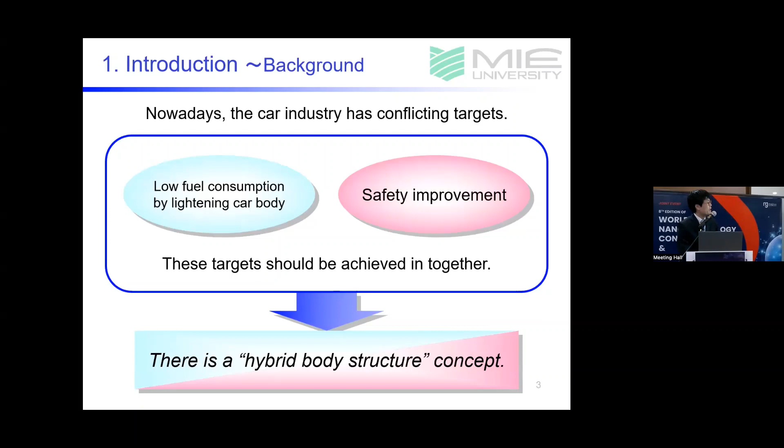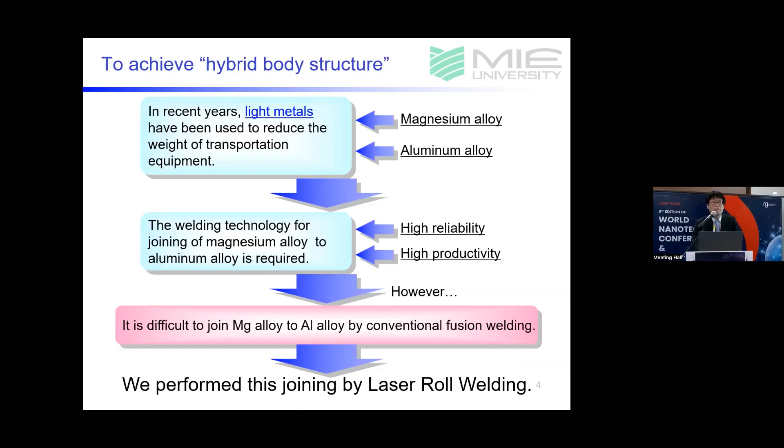So we perform this joining by laser roll welding. This figure shows a schematic drawing of the laser roll welding facility.

Laser roll welding was developed for joining dissimilar metals by Professor Kutsuna. A pressure roller was mounted on a laser facility. It was developed for making lap joints.

At first, material A is placed on top of material B, the upper plate on the lower plate. The laser heats only the upper plate. The roller conducts good contact between the two sheets and rapid heat transfer from the upper plate to the lower plate. The joint is made in this way.

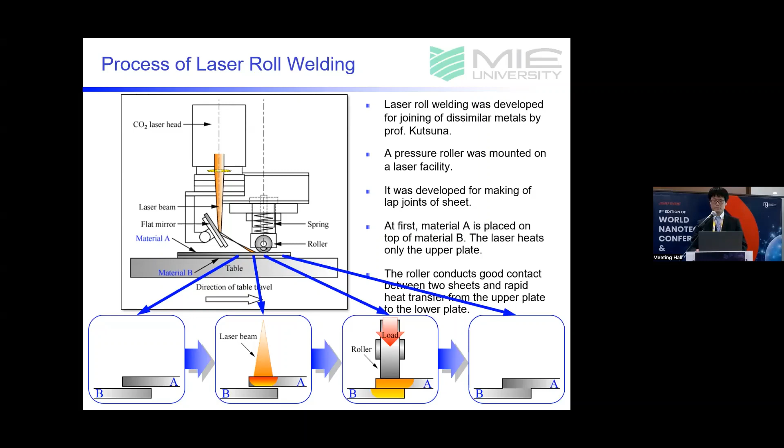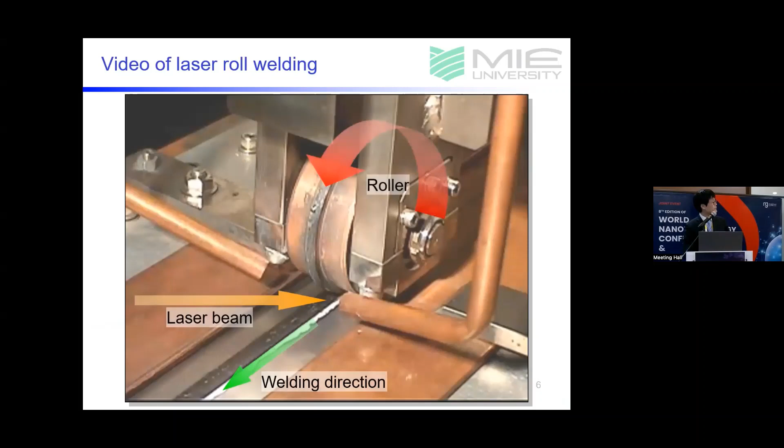Now let's show you the video of the laser welding. In this image, arrows show welding direction and laser irradiation, roller rotation, and shielding gas flow, respectively.

This welding is silent, no spatter, no arc, no porosity. Welding is over.

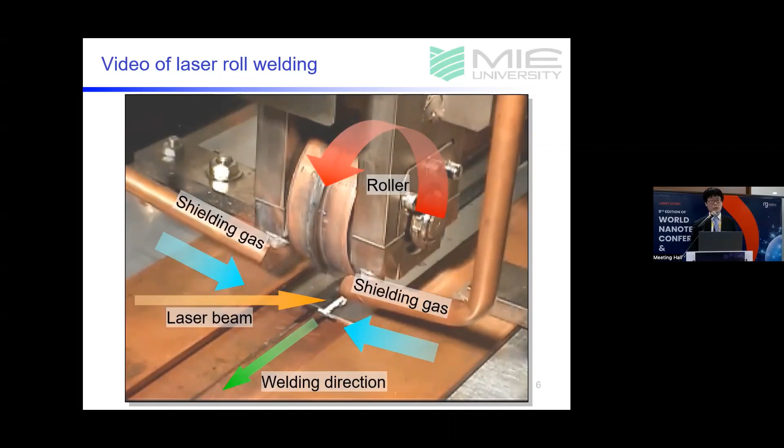In laser roll welding of materials with large melting point differences, the laser beam is irradiated onto the material with a higher melting point. But the melting points of magnesium alloys and aluminum alloys are almost the same. In this case, it is unclear which material should be irradiated with the laser.

Therefore, in the present work, laser roll welding was performed by changing the welding conditions, and the influence of the welding conditions on the joint strength and the microstructure formed at the joint interface was discussed.

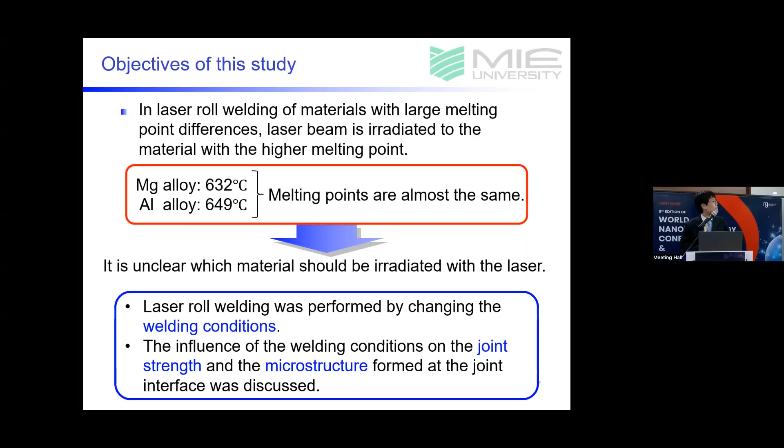For the materials, magnesium alloy sheet MP-AZ31B and aluminum alloy sheet A5052P were used. The thickness of both sheets was 1 millimeter. This table shows the chemical compositions of the materials used.

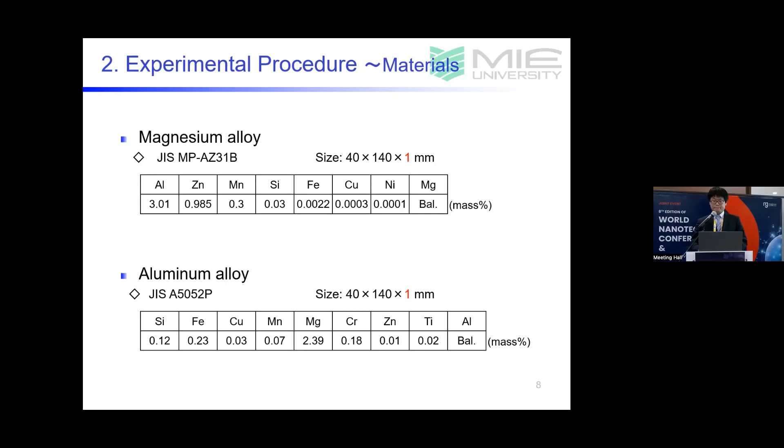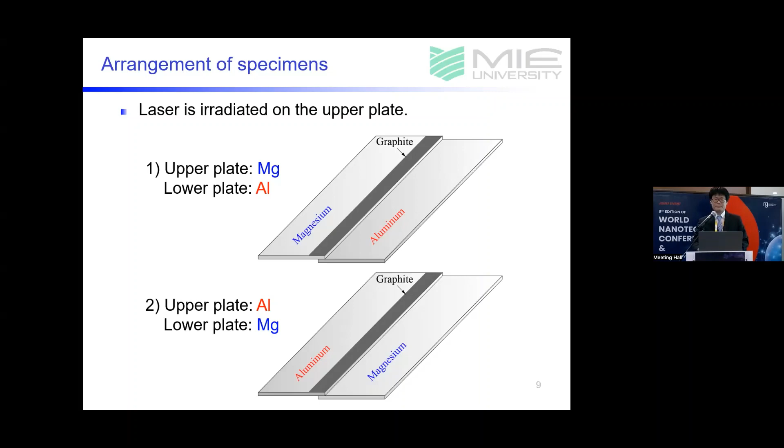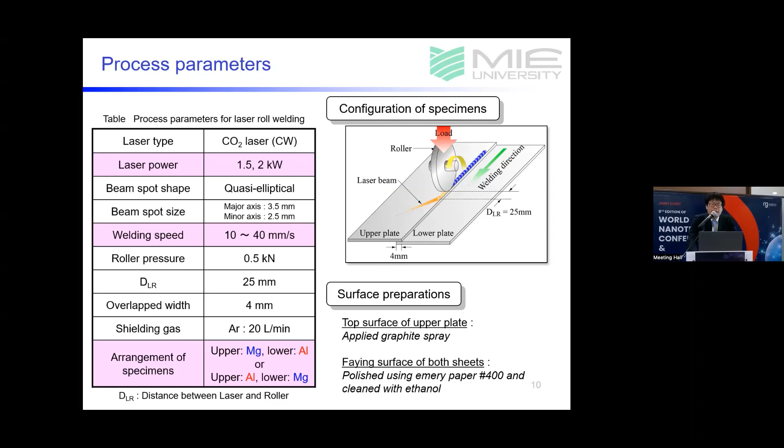Argon gas with a flow rate of 20 liters per minute was used as shielding gas. As mentioned in the previous slide, we tried two types of arrangement of specimens. As surface preparation, we applied graphite spray to the top surface of the upper plate, and polished and cleaned the faying surface of both sheets.

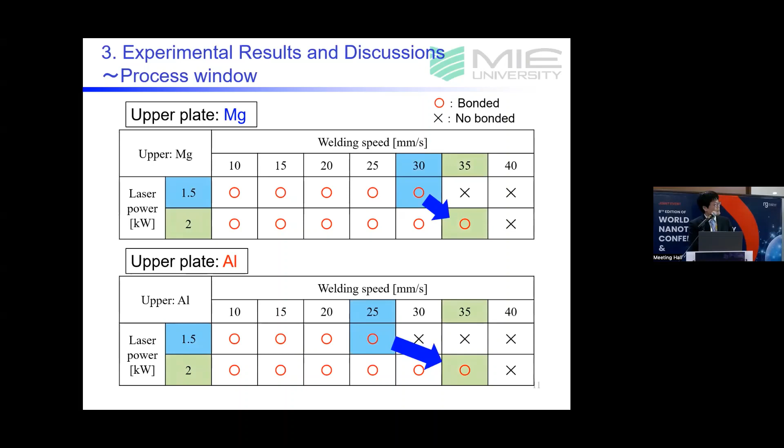At a laser power of 1.5 kilowatt, bonding occurred up to a welding speed of 30 millimeters per second when the upper plate was magnesium, and up to a welding speed of 25 millimeters per second when the upper plate was aluminum. Also, as the laser power increases, the maximum welding speed also increases.

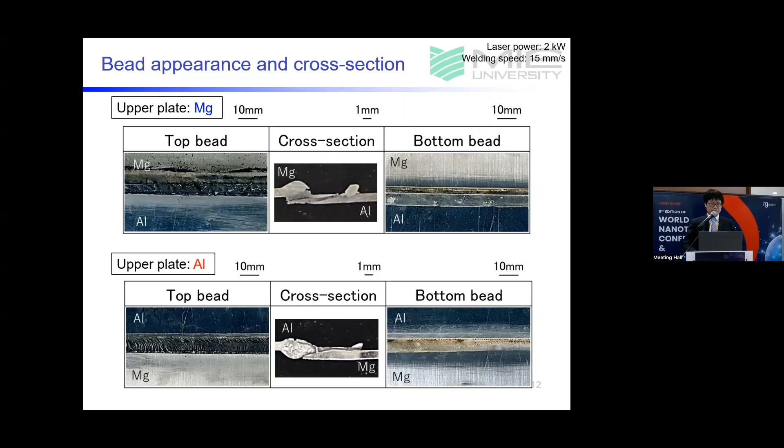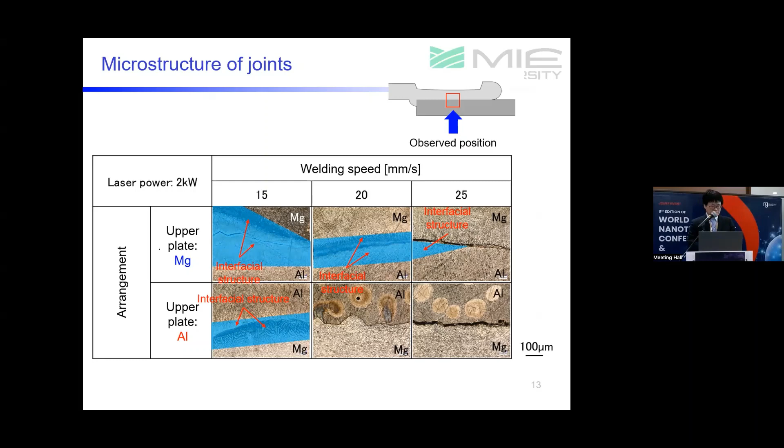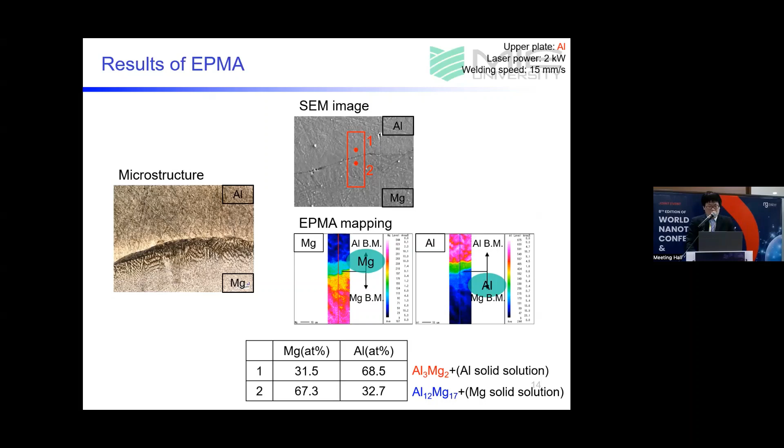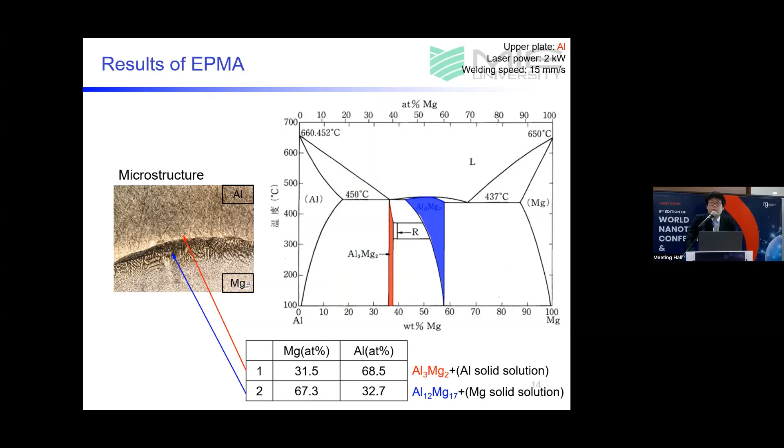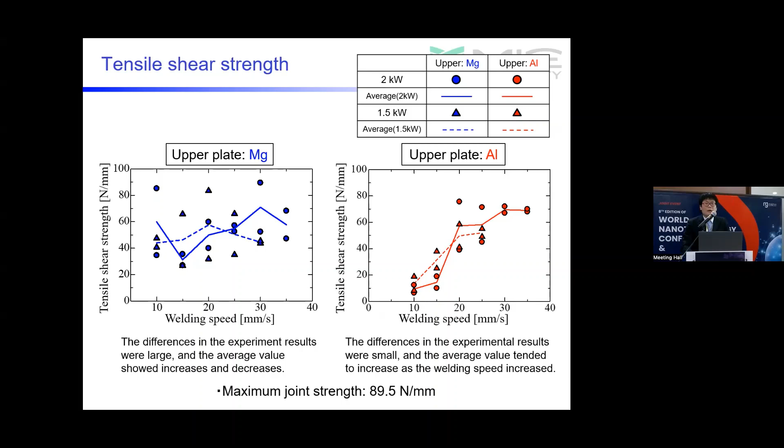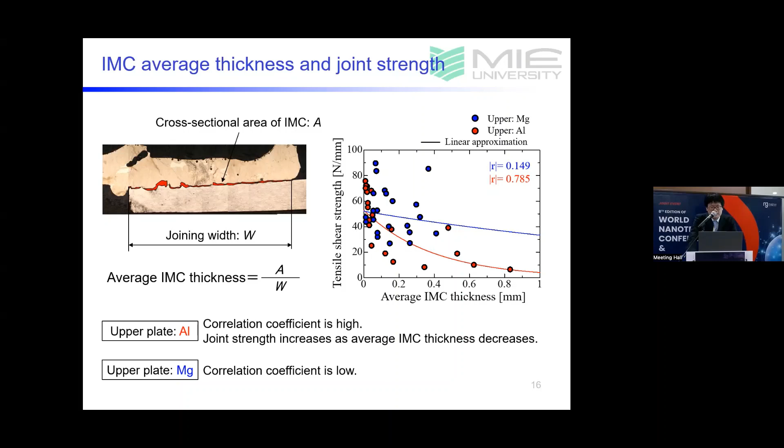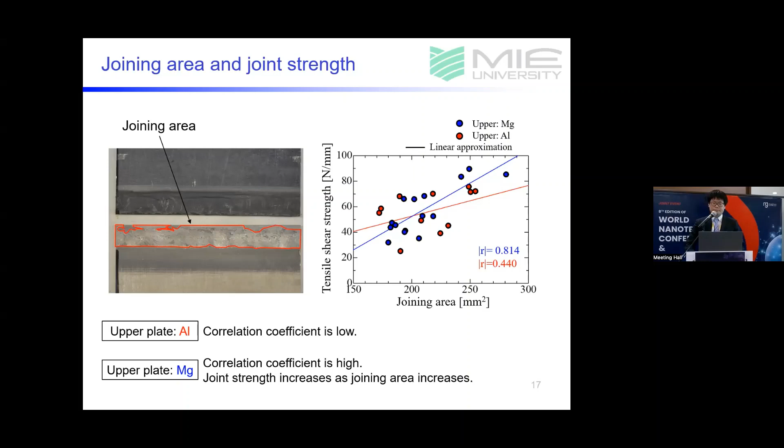Finally, I will show you the conclusion of this study. Thank you very much for your kind attention.